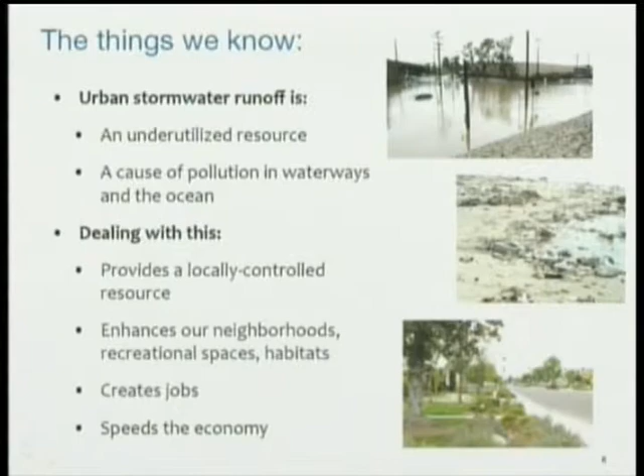The kinds of projects that I'll be talking about tonight that do this, that capture that stormwater, that handle water pollution, also enhance our neighborhoods, our recreational spaces, our habitats. We also know that this creates jobs and speeds the economy, and there's a really neat report that isn't ours. We were involved as an advisor on it, and I'm going to share it with you tonight. It has some great numbers about those last two points.

So at the organization where I work, the council, how we know this stuff, we have a pretty good resume that leads us towards an understanding of water supply augmentation, using rain as a resource, and the questions of water quality.

So this is just a list of some of the things I'm going to talk about in a minute, but we handle monitoring for 2 of the watersheds, the LA and the San Gabriel watersheds. These are programs for the sanitation district on the San Gabriel and for the city of LA and city of Burbank on the LA. We've also been in talks with sanitation. They have on the books a plan to do the whole Santa Clara as well. That project is still in development.

And we've also been working for the last 13 years on the water augmentation study, which is a project to understand how we use stormwater better. And then there's a bunch of sub-projects which we'll talk about as we move forward.

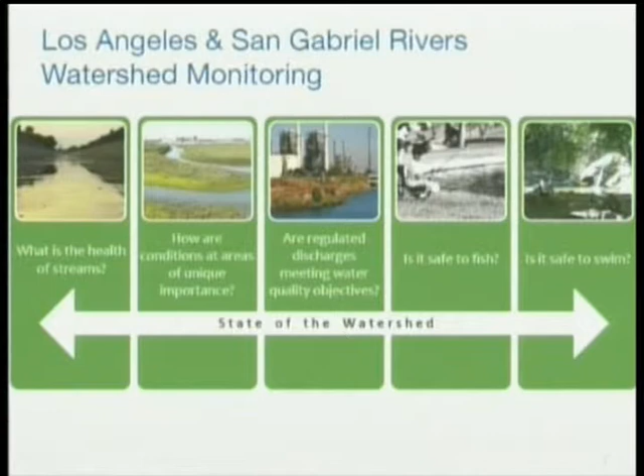But then the last two are the really interesting ones. Is it safe to fish? Can we eat the fish we catch in our waters? And is it safe to swim? Can you safely get in the water here and swim? And both of these programs are trying to answer those questions.

The water augmentation study, this started in 2000, and this was really one of the things that the council started as an organization to accomplish. It started in 2000, and it was multiple partners. The next slide shows you who they are. And it really was seeking to answer this one question, that can we safely and effectively infiltrate urban stormwater to augment our groundwater? In 2000, we did not know that.

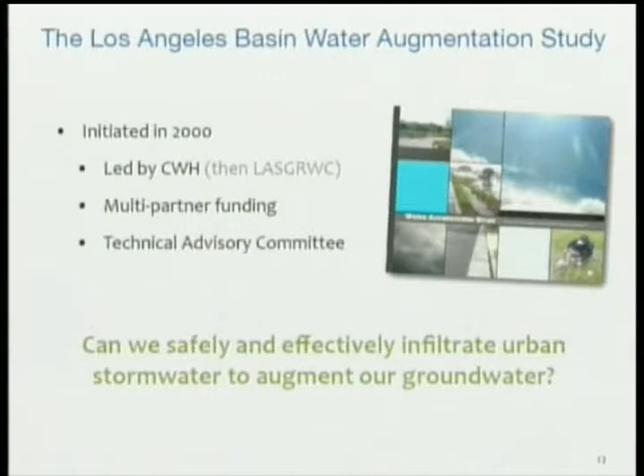We had a sense that it was dirty water. We didn't know what would happen if we put it in the ground. Would we carry all those pollutants down into the groundwater that we relied upon? Nobody really knew the answer. There have been some studies back east, but our system is so different that it needed to get done here.

So the first thing we did is we installed 6 of these green infrastructure systems that would capture rain and get it in the ground. And we monitored at them. We took water samples at the surface before it entered the system. We monitored the water in the soil just below the system, and then the water in the groundwater deep below. And in most of these cases, the groundwater was anywhere between 30 and 300 feet below the infrastructure we put in. And in every case, there was no connection between the surface water quality and the groundwater quality.

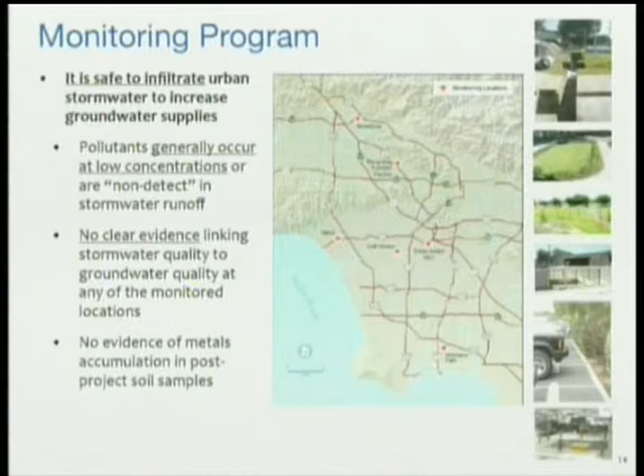What we discovered is that in all of the things that we looked at, and there was 600-some-odd constituents that we looked at, none of the things that are in urban stormwater make it to the groundwater. There's action in the soils and in the plants that remove all of it. Whether it's the oils being eaten by microbes, the metals getting retained by the roots of plants, in every case there's something that cleans it out. Actually, in some cases, we found that adding stormwater to the groundwater improved its quality. So we had groundwater that was slightly degraded by nitrates or salts. And stormwater has those things in such a low level that you add it in, it actually benefits you.

It's in the city of Los Angeles, that was the natural outlet for all the flow from 40 acres of residential land. So this place was flooded whenever it rained, even a little bit. On a heavy storm or a 2-day storm, these families couldn't let their kids go to school. There was so much water in their street. And this is right in the middle of the LA grid. It's not something that you would imagine would be there. And the soils here are perfect for infiltration. If you could get the water from the concrete, from this asphalt, into the dirt, that gets you right into one of the groundwater basins we rely on. It's really high effective soils.

And because of the street that we put in that's capturing so much water and putting it in the ground, we were able to come to this paseo, as we're calling it. It was a non-vehicular alley, and put in this system here, which is capturing even more water and getting even more in the ground. So it becomes a green infrastructure project that captures stormwater, it cleans stormwater, it's a new green space for a community. Right, it brought jobs to the region.

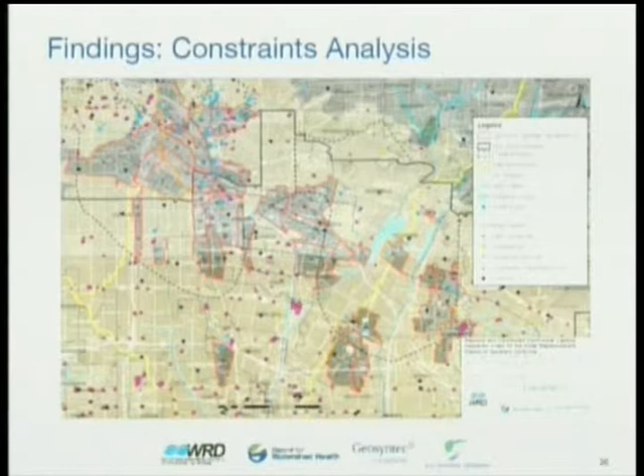So we then dropped a whole bunch of points. These are all the spots where we probably don't want to do stormwater capture right away. It's either a place that used to have a filling station, so it has legacy pollutants in the soils, someone has a permit to pump water out of their basement, or there's a Superfund site. There's a lot of reasons why you wouldn't want to do stormwater there right away. All of these are surmountable challenges. It's just a matter of you don't want to do these first. These are not the highest priority ones.

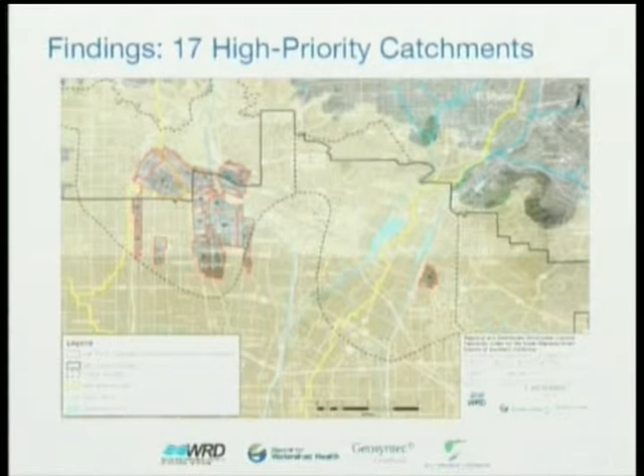And that left us with these 17 catchments to think about. So we went out and looked at them, trying to find a spot where we could draw this idea of what a distributed system would look like. That took us down to these 6 pilots, and then it took us down to these 2 catchments. These are right up to the east of the 110 between USC campus and downtown, right along Broadway. I don't know if anybody knows that area.

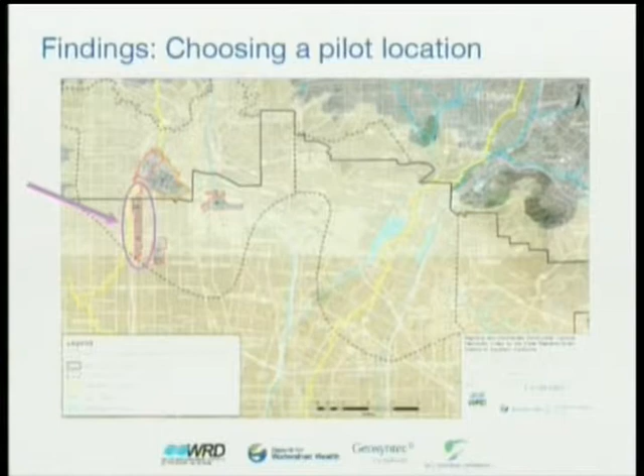So the reason why we picked this area is that we discovered the City of Los Angeles Bureau of Sanitation, who's responsible for stormwater quality, had long had their eyes on this location because they knew it was a problem for them. They knew that they were getting a lot of stormwater pollutants coming off of this section of the city. And they looked at it and said, we need to do something there someday. And then along we come with a water quantity agency, somebody who wants that water. And suddenly we've got some synergy. Let's do it.

So this is a zoom in now on the northern of those two catchments. And this is the pilot concept that we created. We call it a distributed system of systems. So on the right-hand side is the zoom in. You see the blue areas with the little blue dots. Those are residential areas, both single-family and multifamily. And we're suggesting about 40% of them will do something with some incentive. They'll do a rain garden or a rain barrel. They'll help capture some rain.

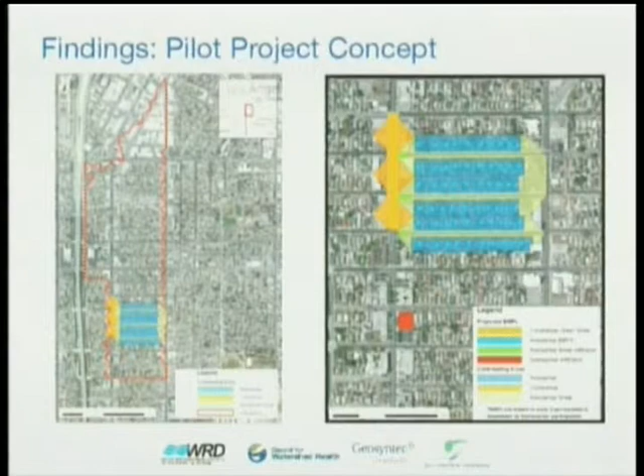Then the residential street at the moment drains on the surface out towards Broadway, which is that orange stuff. We'll put something at the corner there to capture some more of the water. Not all of it, but some more of it. And then on the commercial street, we'll add a little bit more to capture some. And then down in that red box to the bottom, we'll put a big system somewhere underneath the parking lot to capture the rest of it. So that's what these things look like, these 4 BMPs.

You'll hear people in my field talk about BMPs all the time. Those are best management practices, which have become a noun, and it refers to infrastructure. I don't know why. It happened before I was around, so it just is.

The residential property, again, bioswales, a way to capture the rain on their property and get it in the ground. The residential street has some sort of system below it where the water enters a catch basin that looks like a normal catch basin, but rather than being connected to the river, it's connected to the groundwater basin, just like we have at Elmer. And here the commercial street is called Broadway, and it really is a broad way. It is a parking lane, 2 driving lanes, a turn lane, 2 driving lanes, a parking lane. And then the sidewalks, I think, are 26 or 28-foot sidewalks. So we have a huge tapestry to work with here.

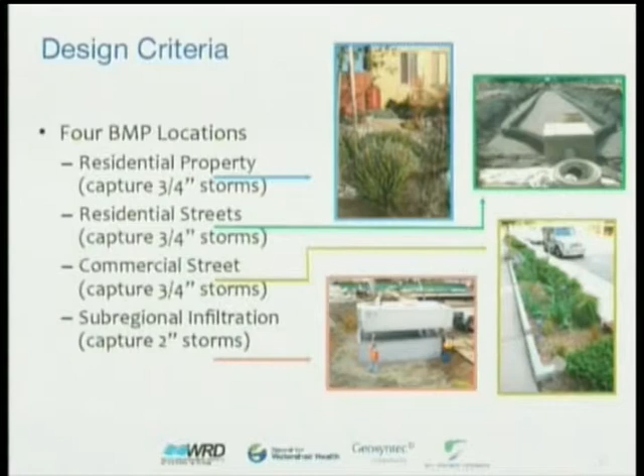So we'll do some sort of bioswale or planted area in the sidewalk that can capture more water coming off the residential, commercial area. And then down under the parking lot, you put something that looks like gray infrastructure. It's a big system. You pull the parking lot up, you dig a big hole, you put a system down there that can hold a lot of water and has an open bottom, and then you put the parking lot back.

Now we talk about this, and this is one of the spots where I start sounding a little bit like a grad student, so I apologize. But the way I sell this is an idea of phased implementation, where what we want to do is we say, let's design this whole catchment. What would it look like to have this whole catchment set up this way with distributed systems that's capturing rain, that's cleaning the water, that's got green? What would it look like to do the whole system? We size everything as if the whole system were there, but that any one piece could survive by itself.

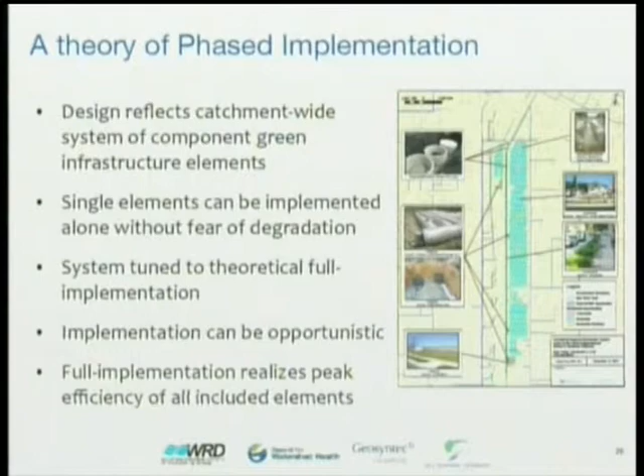Once you have the plan, then you start implementing in an opportunistic way. If you get a grant from the state to do a big piece of infrastructure, you pull up the parking lot and you do it. If you get a foundation who wants to put some money into rain barrels, you do that. And you slowly work on building the system.

It took us 120 years to get the system we have today. It's going to take us a long time to change that system out for the new one. Why not plan the whole thing? Why not do it all according to a plan instead of sort of the hodgepodge that we had to get where we are today? So there's what it looks like.

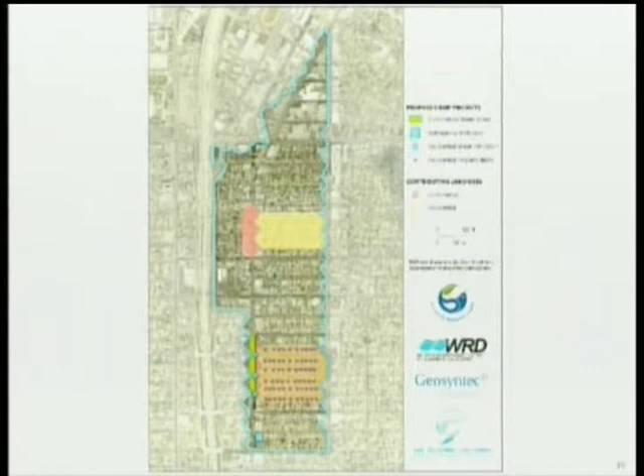These slides kind of animate a little bit. So there's the catchment, and here's that design, the pilot design, and then we put it in. And this then becomes a stamp. We can use it as a stamp to stamp our way across the city doing this work. So we use the same plan in a different spot when more money comes along, and we add some more, and we add some more, and maybe 60 years, maybe 80 years, maybe 20 years if we get lucky, we've changed the whole system out, and we've got a distributed system that brings all of these multiple benefits, replacing that old one.

So when we do the feasibility study summary, we have big water, right? Those 49 catchments that we identified have the potential to capture, using those systems, about 17,000 acre-feet a year, which is big numbers. Even the 4,300, which is in that smaller number, the 17 high-priority catchments, that 4,300 would be sufficient for WRD to stop buying imported water. That's enough. Now, it's a big lift to get there, to do that fully distributed system. We recognize that. But the potential is there.

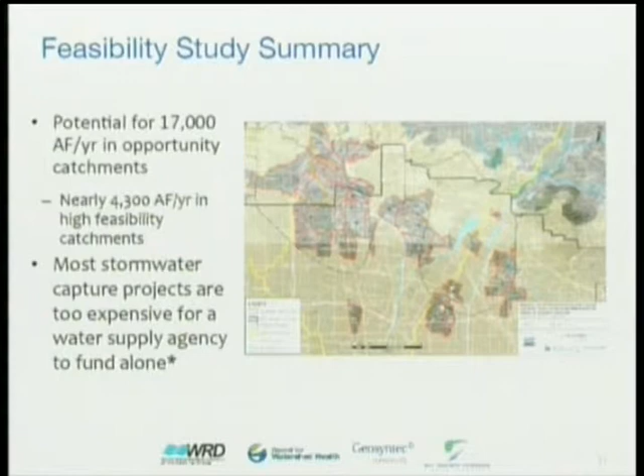The other conclusion we came to is that these projects are too expensive for a water supply agency to do all by themselves. But if you remember the way this story started, we picked this spot because there was a sanitation department interested in doing something there too. So now we have two agencies who are both going to benefit from one project, and we start talking about how we leverage these things together.

So green infrastructure versus gray infrastructure, there's some interesting things to talk about here. Gray infrastructure, we normally think about it as single purpose. It is flood control, or it is water quality. It's one thing. That's how we used to build it. We had one agency build one thing. It's managed by one agency. It's maintained by one agency. It's funded through one agency's budget.

The other thing about gray infrastructure is whenever we go to build a new piece, we're leveraging 100 years of investment in the stuff we've got already. So we think about gray infrastructure as being cheaper than green infrastructure. It's cheaper because we're tying into a system that exists, that has all this investment already tied into it. And we don't normally talk about that pre-existing investment.

Green infrastructure, on the other hand, becomes multi-purpose. It solves multiple problems at one time. It's managed by multiple agencies. It's maintained by multiple agencies, sometimes not even agencies themselves, right?

If you have a rain barrel in your yard, that's yours to maintain and benefit from. And this is the other spot where I sound horribly like a grad student. I apologize. Green infrastructure internalizes historic externalities. I'll explain what this means. It raises the apparent costs.

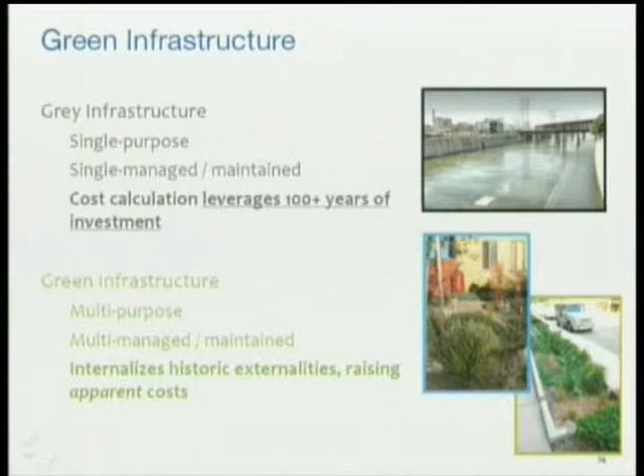So right now, gray infrastructure takes our stormwater and runs it out to the bay. People then go surfing in the bay. They step on a rock, they cut their toe, they get an infection, they go to the hospital, right? They don't have insurance, we all help pay for it. That cost is because of the gray infrastructure, right? We don't normally connect those dots.

Green infrastructure, on the other hand, when we put it in, captures those costs that happen out there in the ocean to the surfer's toe and drags it back up into the project. So the project becomes more expensive, but you're capturing costs that are currently outside of the way we think about infrastructure. So it's a change in our philosophy in the way we calculate and consider cost.

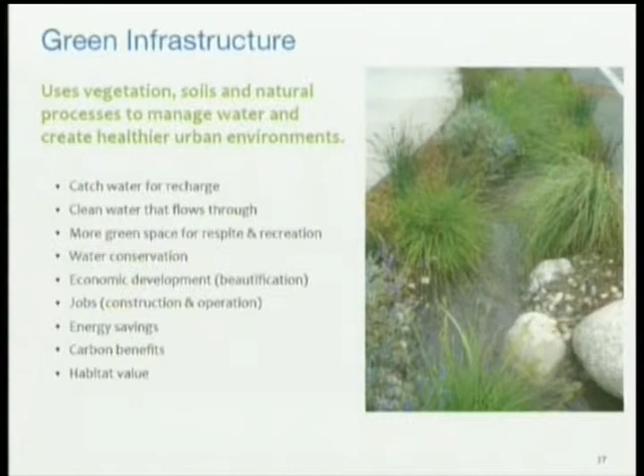And this is a repeat of the earlier slide. Just to refresh, right? Green infrastructure, we're using vegetation, soils, and natural processes, the infiltration through soil, for instance, to do this cleaning, to manage our water. So there's this other great report, and I thought this crowd would appreciate it. It's still in draft status, and it should be ready, I hope, in the next month or two. We got a grant from the EPA to have some consultants work on this for us.

And what we asked them was, can you go look at a bunch of the regulatory and legislative drivers that are impacting our cities right now and think about how green infrastructure can help them? And so they looked at AB 32, SB 375, the two state climate acts. They looked at the Water Conservation Act from 2009, the Water Efficient Landscaping Ordinance, the municipal stormwater permits for the LA region, and then a whole bunch of other regional drivers like the IRWM Plan and the Basin Plan, TMDL plans. Some of these I think this crowd probably is familiar with. There's a lot of plans.

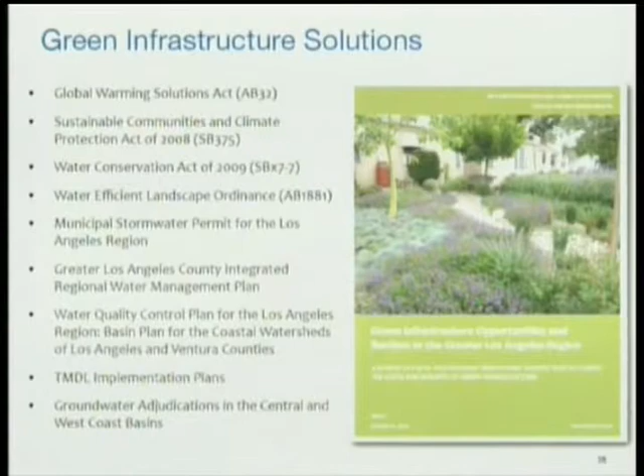And what this report is showing is that these green infrastructure projects, not only do they serve the multiple benefits of stormwater quality, stormwater quantity, green space, jobs, but they can check a lot of boxes if you're a city trying to respond to these drivers. They can help you with your climate change adaptation. They can help you with your sustainable landscape ordinances. They can help you with your water reduction requirements. So they can really help with a lot of different things.

And this is where I get to the gravy, which is not even mine, right? I just poured it on here at the end from another organization. So the Economic Roundtable is a nonprofit down in LA that did a report. They studied $1.2 billion of water project investments that have happened here in the region over the last number of years. And these are projects that dealt with stormwater, with water conservation, water treatment, so these are the treatment plants, groundwater management and remediation projects, so cleaning the groundwater, and recycled water projects. So these are a whole suite of different projects.

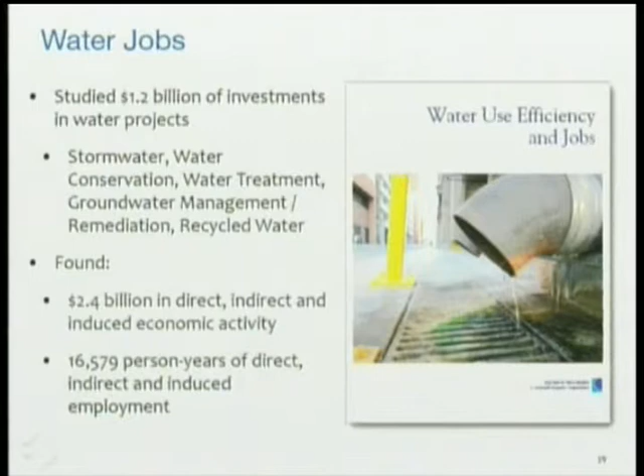And what they found was, of that $1.2 billion invested, we got $2.4 billion in economic activity, and we had 16,000 person years of employment based on that $1.2 billion. So the next slide is really the shining star of all of this. The report shows that for every $1 million spent on a water project, we stimulate between $1.9 and $2.1 million of total sales. So that's the million of the project and another million of downstream, pun entirely intended, economic activity, where the people working on the project go out and buy Subway, or they pay their rent, or whatever.

It also creates, and these are permanent created jobs, between 12 and 16 permanent jobs for the economy in the green industry, the green economy that we all talk about wanting to form. And of these jobs, the wages range between $33,000 and $52,000 a year. And in the way that economists think about these things, that performance exceeds that of the motion picture and video production category of jobs and the housing construction jobs, right? So these are two that our region has historically pointed to as driving forces of our economy.

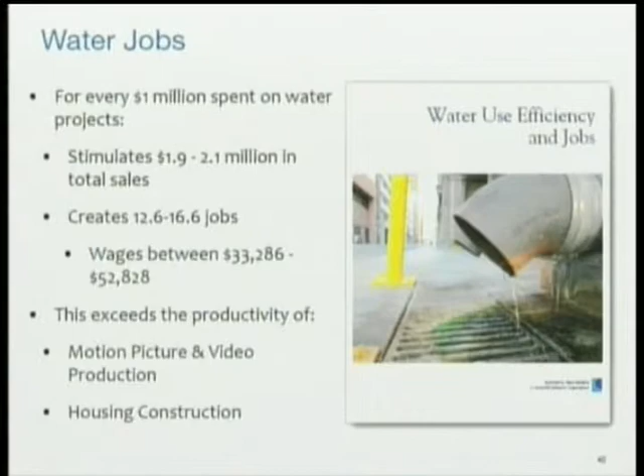And these water jobs here are shown to outperform those as far as their economic impact. So this is a really interesting report. It's available. I think we have a link through our website to it and a bunch of the other reports that I've shown you today.

So just to summarize some of the things that I talked about, water is critical, clearly, to our social, economic, and ecosystem health, right? We are a community, we are a healthy community because of our water resources. And when the climate starts changing for us, the place we're going to feel it first is our water. That's where we're going to need to adapt.

Urban stormwater runoff, it's an underutilized resource. In the LA area, so south of here, we have numbers that show pre-development, the landscape captured about 95% of all rain that fell on it; it would end up in the soils, in the plants, or in the ground. Now it's only about 50%, right? So we built, and now we send a whole bunch more water to the ocean than we used to. All that water we do send to the ocean causes a lot of damage. It causes impact to human health, and it causes damage to the environment that we rely on.

And this is where I touch most closely on the issue of the stormwater fee. The water quality mitigation that's before us, that's regulated by the U.S. EPA and the state boards based on the Clean Water Act, that regulated requirement, it stands before us. It's not going to go away, and it's going to be expensive. But it can be leveraged to provide multiple benefits. It doesn't have to just be water quality that we fix. It can be water quality, it can be water quantity, it can be our economy, it can be our green space, it can be our habitats.